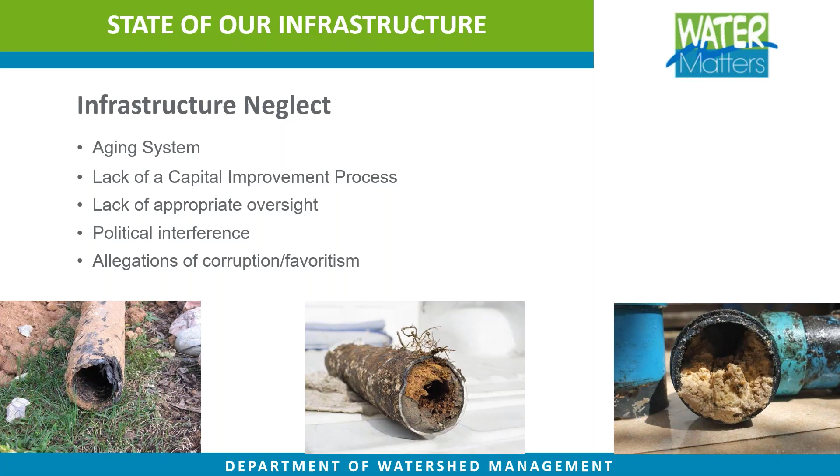So here's just a quick timeline. DeKalb County was formed in 1822, and there was a rapid growth from the 40s into the 70s, which caused the Watershed Management Department, which is my department, to be created to provide centralized water and sewer service.

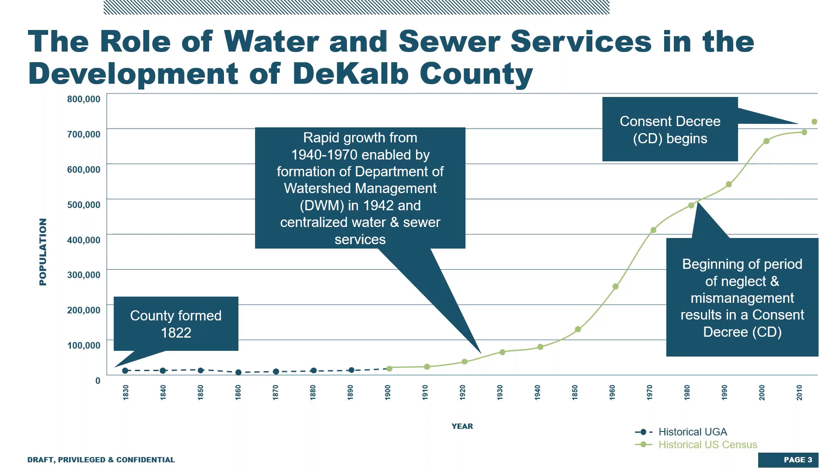Well, at that point, the county really began to grow. And because of that, and the fact that we were entering a period of neglect and mismanagement, we weren't able to keep up with not only the demand, but as I mentioned earlier, we certainly were not paying attention to the maintenance and repair. So those things combined caused us to have to enter into a consent decree with the US EPA in 2011.

So what is this consent decree I keep talking about? Well, because continuous sanitary sewer overflows, otherwise known as SSOs, were occurring within the county, EPA did an audit of our entire water and wastewater system. And they determined, as I mentioned, that we just had no clue, and basically federal oversight was warranted.

So we entered into the original consent decree in 2011, and basically through a bunch of different programs and requirements, we were ordered to reduce our SSOs in order to comply with federal laws.

So originally, we had a deadline of 2020. Well, as we were trying to get up to speed and honestly trying to do the right thing, unfortunately, we missed that deadline. So we went back to EPA and negotiated a modification that included an extension up until 2027 to get all of the work done that we needed to. Unfortunately, because we had to ask for a modification, there are some much more rigorous requirements, especially regarding schedule of priority areas and reporting requirements.

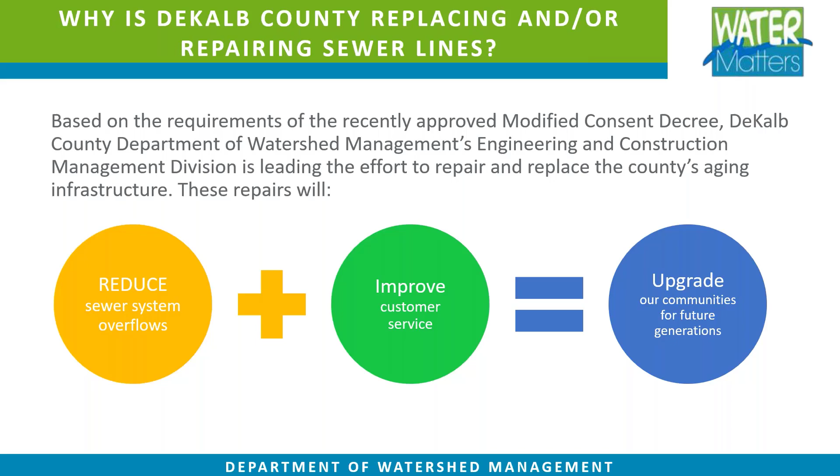So this is basically, in a nutshell, what we're trying to accomplish. A, we need to reduce our sewer system overflows. That, combined with improved customer service to our ratepayers, will hopefully equal by 2027, if not before, an upgrade for our communities for future generations. Basically, we are learning to become a more sustainable organization.

All right, so that's pretty much the review of the consent decree, and I didn't really want to bore you guys with too many of the details on that, which, believe me, I could go on for days. But I wanted to get into some things that I think you probably are a little bit more interested in, and that is some of the innovative strategies that we've used on some of our repair projects.

So this first one is Eagles Beak Circle, and there was a spill that occurred in August 2017 from a tree whose roots had punched into a 54-inch sewer main. And that wasn't necessarily the cause of the spill at that time, but unfortunately that tree fell, basically uprooting the 54-inch main and allowing for a lot of sewage to leak out. So it was a very large repair that, of course, we needed to address in a very short period of time.

It was also in a remote area, and it wasn't identified by a resident, which so often happens in our county, but it was identified by a county staff person who was doing some stream sampling and noted some very high fecal counts downstream of where he was sampling. So as a result, county staff walked the creek until they saw the broken crossing.

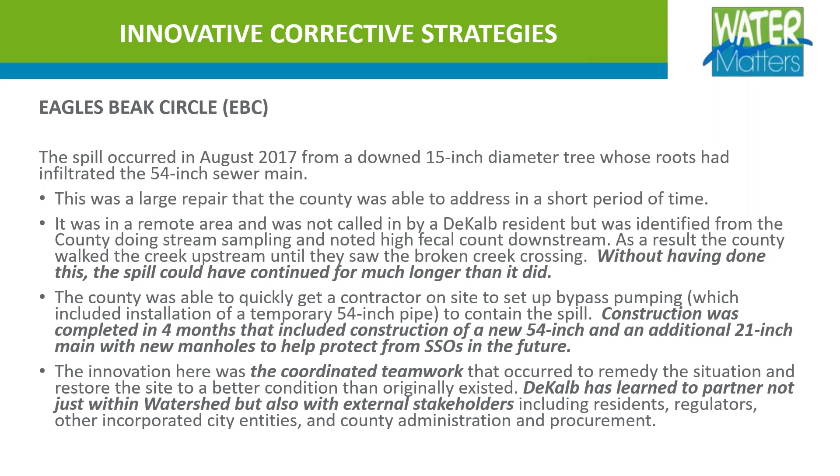And I think the innovative takeaway here is that we've learned to truly partner, not just within our department, but also with external stakeholders. And that includes anybody from residents, regulators, other incorporated cities within unincorporated DeKalb County, and definitely county administration and procurement, which, as I mentioned, had been lacking in the past.

So, Brent, before you move on, is that a picture of it? Yes. So, again, I'm a novice, and so I have a question. So, it was discovered by routine sampling downstream. Is that what you said? Yes. Is that something you do regularly? Is that regulated? Is that an expectation? And or why do you do that? And what's your process to do that sampling?

Yeah. So it is a requirement. It's a requirement of the state of Georgia. And one of the plans the state requires of us to have, unrelated to the consent decree, is what is known as a watershed protection plan. And some of that entails this sampling that was going on.

There are several permanent sample locations throughout the county that were identified as potentially high contaminant sites. And so those locations were agreed upon between the county and the state that they would be continually monitored, and that is on a monthly basis. And so that flow monitoring team just happened to be out at one of their sites, and in the samples, they found these high fecal counts that they had not seen at this location before.

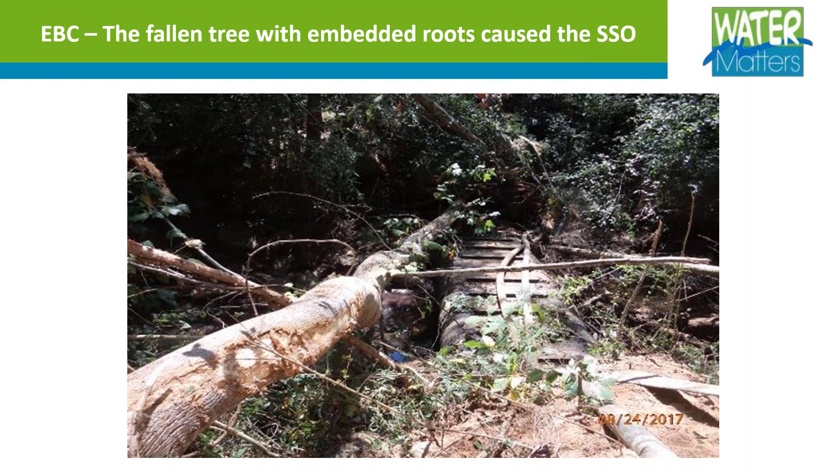So I do have a few pictures just so you can see what we were dealing with. So here's a picture of that 15-inch tree that fell, uprooting the 54-inch sewer main along with it. And so this is the temporary bypass that needed to be created, because obviously there was still sewage coming down through that line. So in order to make the repair, we have to install what is known as a bypass to keep that system operational and allow the flow to continue down to the treatment facilities.

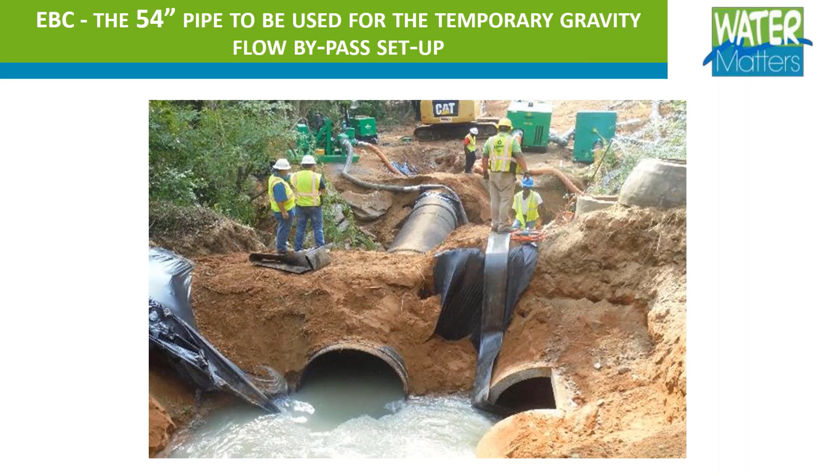So it's quite a laborious process, because not only do we need the bypass, but then we need to be able to isolate the flows, remove the damaged pipe, install the new system, and do this in a very coordinated but simultaneous schedule. So to get all of this done, especially for a 54-inch main within 4 months, is pretty impressive. So here's what the final repair looked like. And you can see the additional green manholes that were installed. We added 4 additional. You can see the new creek crossing here.

You can see some of the bank stabilization that was done because areas of that creek were severely eroded, the banks. You can see the other restoration that happened. As I said, this was a fairly remote area, and what you're seeing now had all been cleared in order to perform this project. And so I think the restoration looks terrific. They've opened it up. It'll be easier to inspect and maintain.

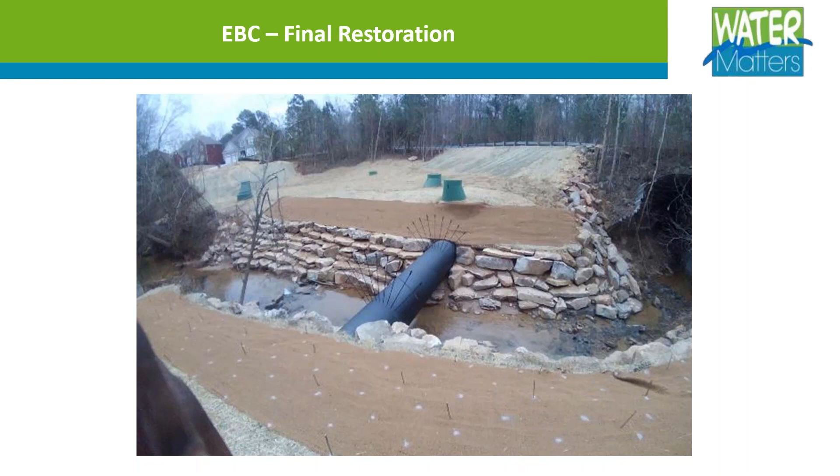I'm particularly impressed. I love these little almost decorative fences they put at either side of that stream crossing, just to prevent kids and vandals from walking across the pipe. So I think all in all, it was a great project and turned out really well. All right, the next project I'd like to talk about is at Glen Lake Park. So this spill occurred in a highly used city park, the city being the city of Decatur, Georgia, and it was caused by a contractor error. They messed up. They caused a breach in the pipe.

However, they were aware of this very unique technology called infrastructure mainline point repair system. And so the main benefit of this is that it's a no-dig solution. So that right there is going to make things a lot quicker and a lot cheaper, and more importantly, it helps minimize service interruption. So there's no broken pipe removal.

What they do is they have a patented, easy-to-wrap sewn fiberglass liner that is inserted into the damaged pipe, is heated, and when that happens, the fiberglass expands and it adheres to the interior of the existing pipe. And they have all different kinds to make sure they're not going to restrict flow within the existing pipe. So it's pretty unique. I actually went out to this location to witness the repair. I was pretty fascinated by it.

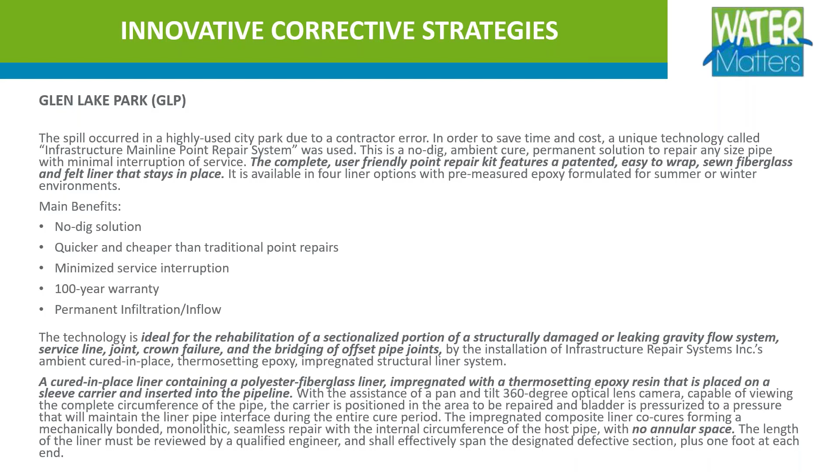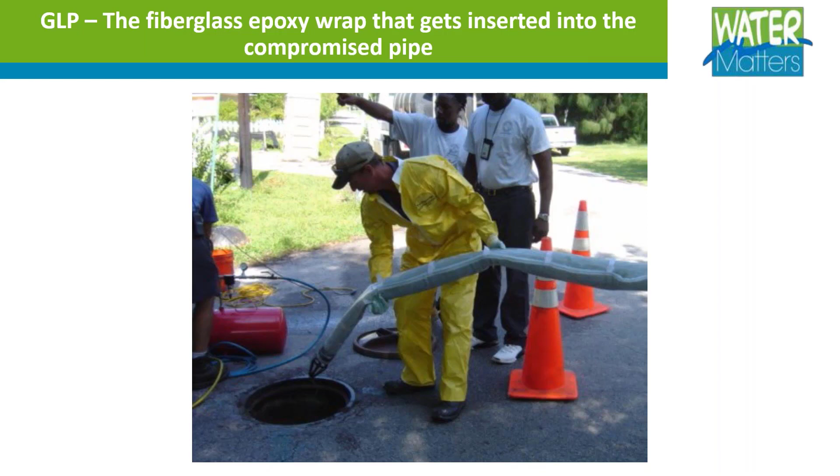And I saw that you had the camera down there to assess the damage of this particular incident. Do you have a process in place to use that camera to look through your systems at any regularity, or how is that used? Oh yeah, we have, and this is all part of a consent decree requirement. We now have a regular sewer cleaning schedule that we have to adhere to, and part of that includes doing the CCTV work. So at least EPA provided a little bit of common sense on this one, because they said, just like if you're doing a repair, hey, run the CCTV first to make sure there really is a repair needed.

So similarly with the regular cleaning schedule, they said, okay, run the CCTV first to make sure the pipe needs to be cleaned. Because some of these pipes fill up with sediment and trash a lot quicker than others. So there's no sense in cleaning a pipe that doesn't need it, especially when there are others that need it more often. So this really helps us save on resources and prioritize the areas that we clean more often than not.

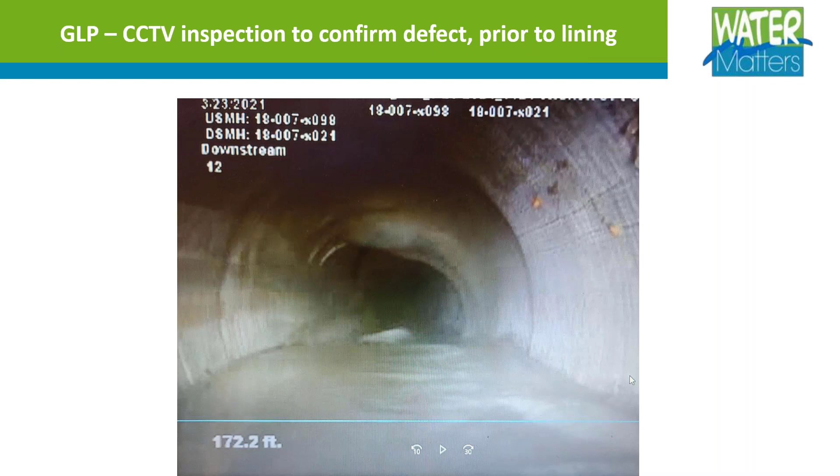All right, so we're getting close to the end here. One of the other strategies, which isn't particularly innovative, but it is so super important, I cannot stress this enough, is the communications strategy that we have to have with the public. So obviously there's a lot going on with the consent decree requirements, not just repairs, of course, not just cleanings, but there are capital improvement projects going on, which is basically yanking out this old pipe, replacing it with new and bigger pipe. So there's a lot of balls in the air all at once, and the community needs to be kept in the know, especially as it's going to impact their property. And you can imagine, and that's only fair.

And we have really, really put together a strong public relations team within Watershed, because there are so many specific programs within Watershed related to the consent decree. So, of course, we do regular mailings. We use door hangers to say, hey, guys, this is an issue. We're coming through your property. Here's sometimes 2-week notice just to put you on notice. And then certainly we follow back up 48 hours to 72 hours in advance of when we will actually be there. We do email blasts, Twitter, social media, websites. I mean, you name it, and we are on it in an attempt to keep our residents apprised every step of the way.